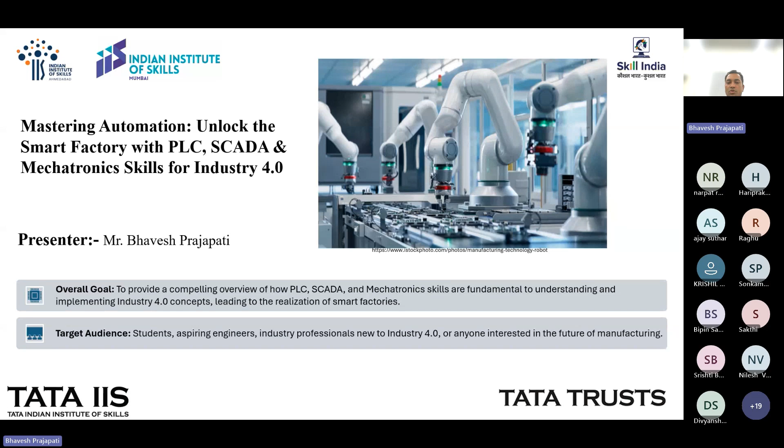This webinar must be interactive, not one-sided. However, your mic is not enabled yet, so I will request you to type your answer in the chat box.

So the first question is, what is mechatronics and what is automation? You can give the answer in the chat box. Meanwhile I can explain, but you can share your answer in the chat box so I can see.

Before Industry 4.0, this concept is very important to understand: automation. Everyone has this question, and many students and people are unable to answer what is automation. There is no fixed definition for automation, so anybody can define it in their own way.

So that is automation, this is one of the definitions. We cannot say this is the only definition for automation; anybody can define automation in their own language also.

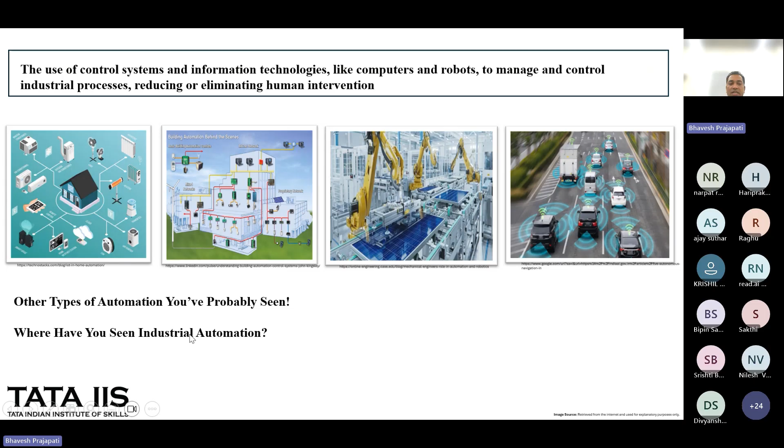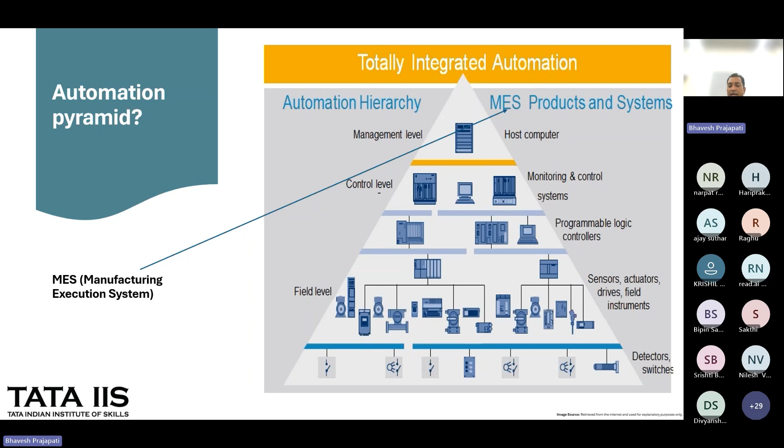In this slide you can see detectors, switches, and sensors are at the field level in the hierarchy. Another is programmable logic controllers — all controllers used in automation come in the level above the field level. Then control level: in control level we can put all monitoring devices like SCADA and HMIs, or any monitoring system. The last one is management level or supervisory level. All these systems are controlled by the supervisory or management level. This is the common scenario of a manufacturing execution system, MES, product and system. You can type your questions in the chat box if you have a question regarding that system.

So many people are typing questions in the chat box.

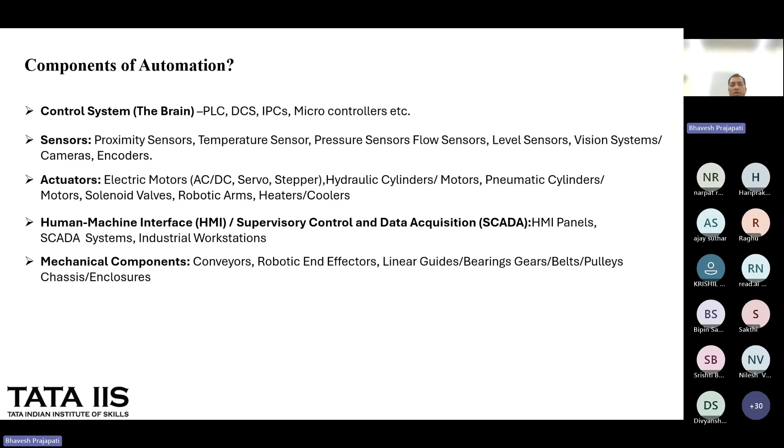Another is mechanical components like conveyors, end effectors, linear guides, pulleys - all these things you can consider as mechanical components. So these are the basic components of automation. If you want to design any kind of system, you have to study all these components first, then only you can design the system.

So these are the basics before going into Industry 4.0. It is very necessary for all students and beginners to first understand what Industry 3.0 is, because nowadays if you know all the revolutions, only then can you define Industry 4.0. But if you don't know what revolutions happened in the past, then Industry 4.0 becomes very new, confusing words for you.

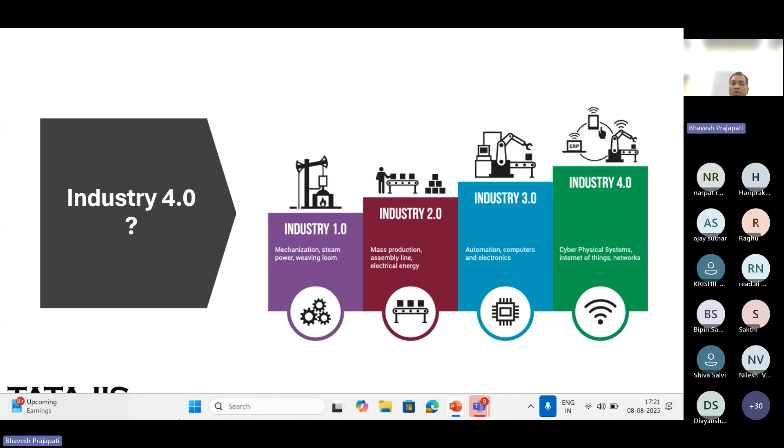If you have a related question, you can type it in the chat box. So another point is, why does Industry 4.0 matter?

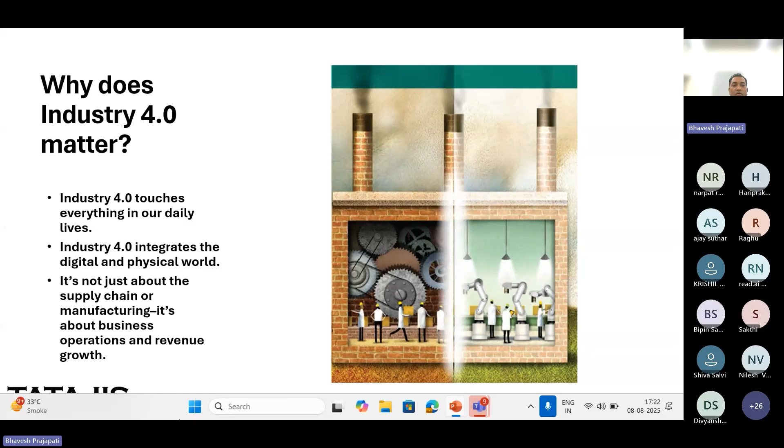This can happen only by using the Industry 4.0 concept, or you can say IoT. So, why does Industry 4.0 matter to students?

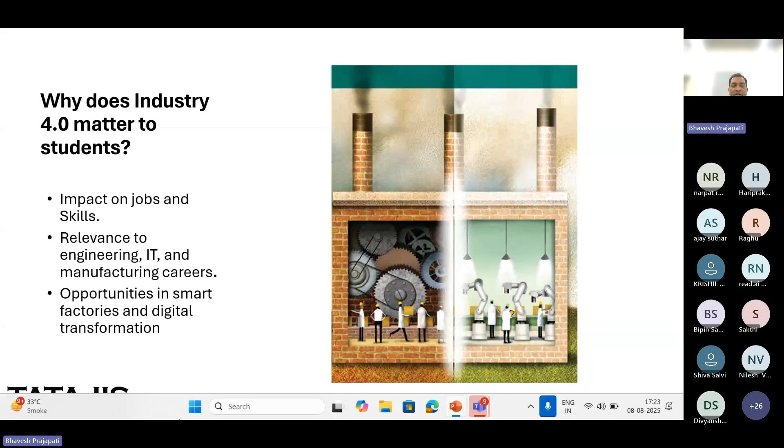Relevance to engineering, IT, and manufacturing careers, opportunities in smart factories and digital transformation. You have many opportunities in the upcoming future if the Industry 4.0 concept comes.

So here is just a short video. I cannot show all the videos, but you can see this one related to Industry 4.0: what is Industry 4.0 and what does it mean for you?

Technology is driving change across all areas of society. Not only do we increasingly use it and even rely on it in our personal lives, we also find our workplaces digitally evolving, with more and more processes now being undertaken using technology.

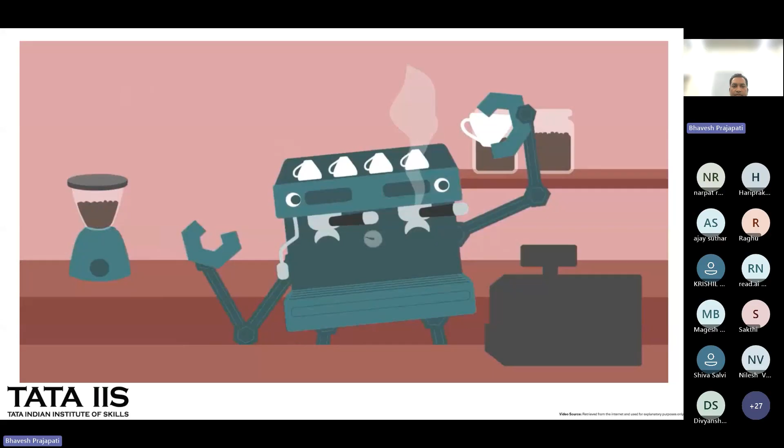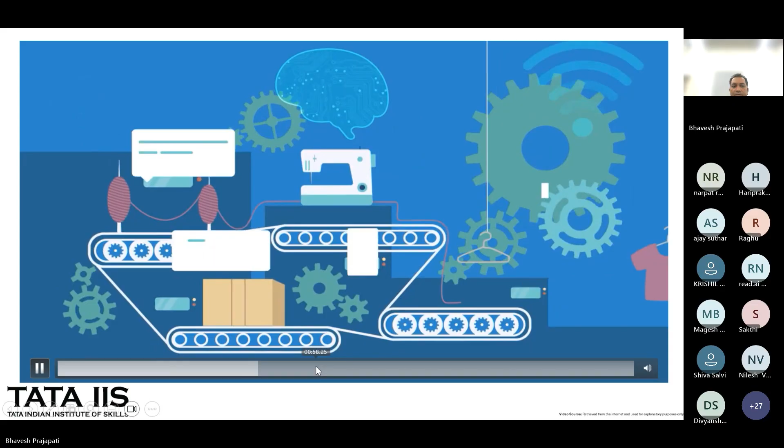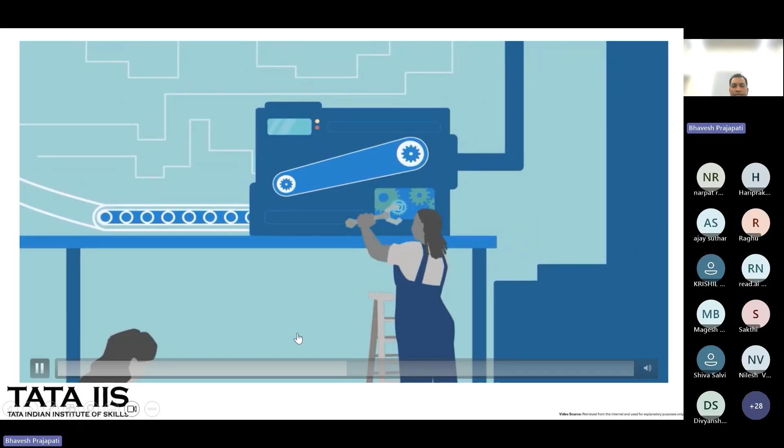This change is known as the Fourth Industrial Revolution, or Industry 4.0. Industry 4.0 will see many tasks that were once performed by us now done through the collection and analysis of real-time data, artificial intelligence, and the ability for all components of production to communicate with each other. Production can be really efficient and personalized according to customer needs. But what does this mean for us? With increased automation, our time will be freed for concentrating on more complex tasks. We will need a workforce capable of building and programming these technologies, but also making sure we are applying them to our lives in an ethical way.

There are core skills that we can offer that technology cannot replace. The human touch is going to be incredibly important, ensuring effective communication, problem solving, and supporting change management in this digital environment. There will also be a greater need for joint working across disciplines, creating new innovations. The future job market will be looking for graduates with an open mind to explore unknown future possibilities. We will all need to develop our skills in order to embrace and adapt to this ever-changing environment. What will you do to make sure you are ready?

You can type your answer in the chat box for this question, which is asked in the video, so you can understand better.

You can type your answer in the chat box.

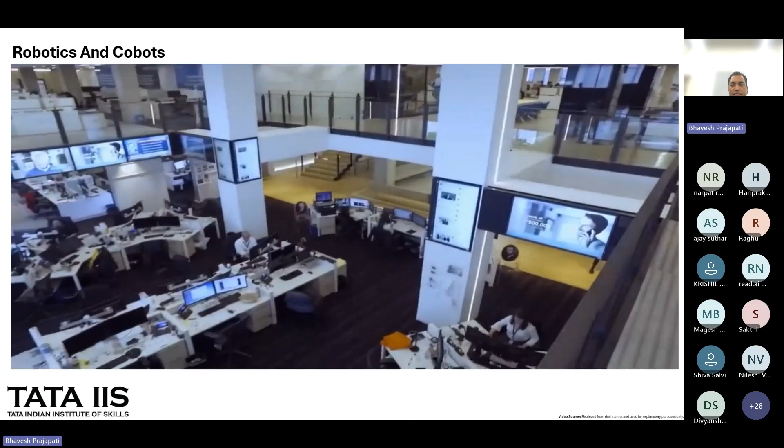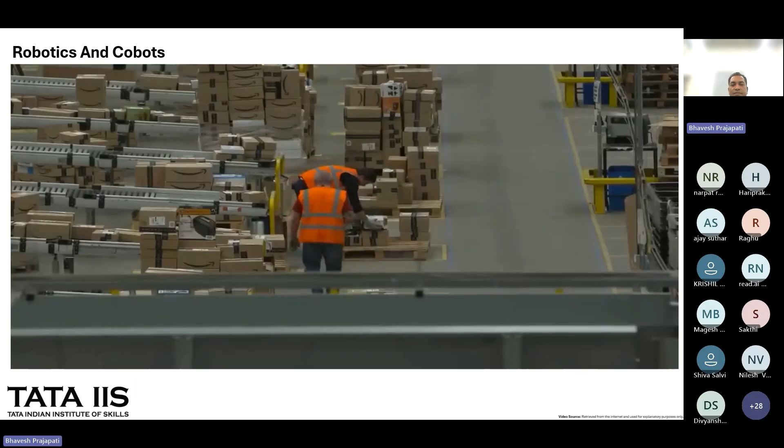Amazon is the world's biggest retailer, and its CEO, Jeff Bezos, is the world's richest man for one very good reason: his company is better than anyone else at giving people what they want quickly. Amazon acquired its undisputed status as the heavyweight champion of the retail universe thanks largely to its lightning-fast delivery times. The astonishing feat of ferrying hundreds of millions of items, from guitar strings to saucepans to car parts, directly to your door inside 24 hours is nothing short of a modern logistical miracle.

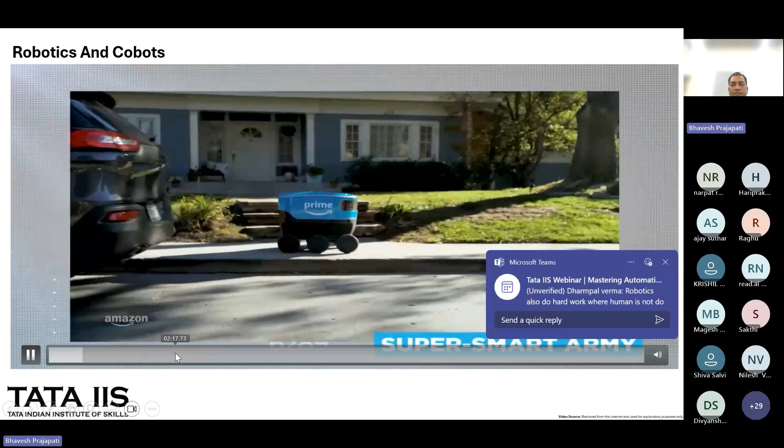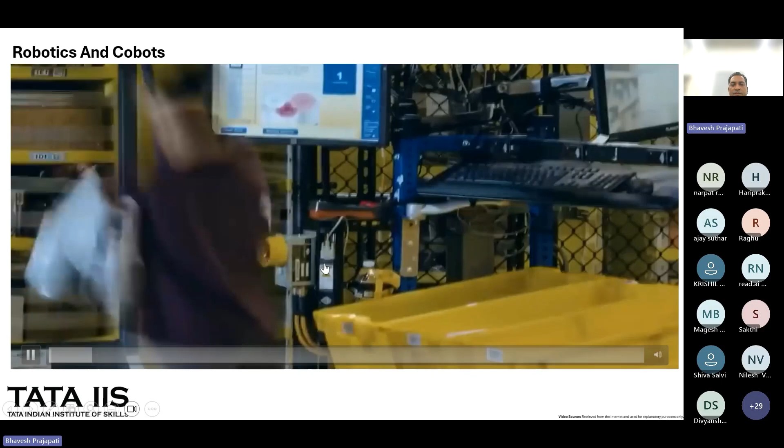So how does Amazon do it? A super smart army of slave robots, for one. Ingenious, if occasionally unscrupulous, management practices are part of the answer too. And the modern-day voodoo of deep learning AI, all of which are made flesh in the most advanced stockrooms the world has ever seen. So join us today as we button up our high-vis jacket and journey inside Amazon's smart warehouses.

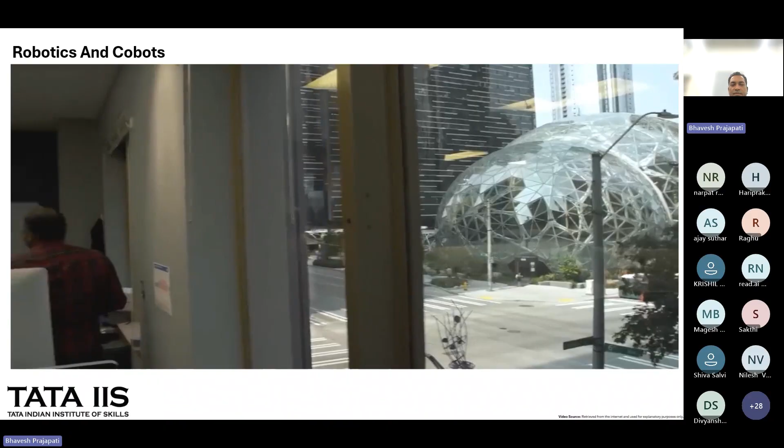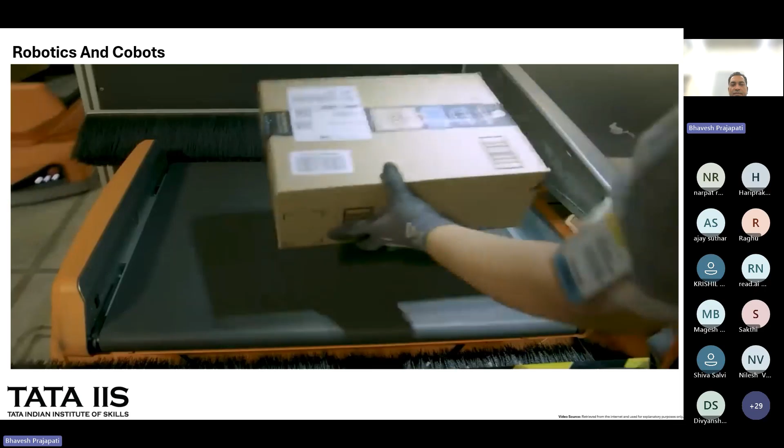In the year to September 2020, with the global economy in the teeth of coronavirus and the bleakest employment outlook in history, Amazon reported global revenues of little under $350 billion. That's roughly double what it earned in 2017, by the way. Only 3 short years.

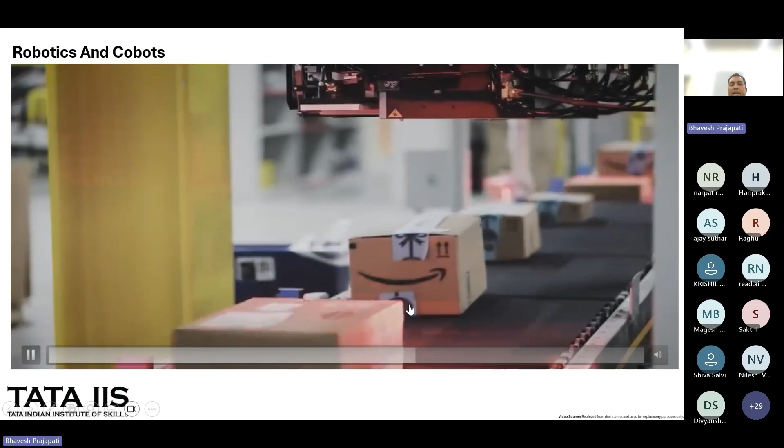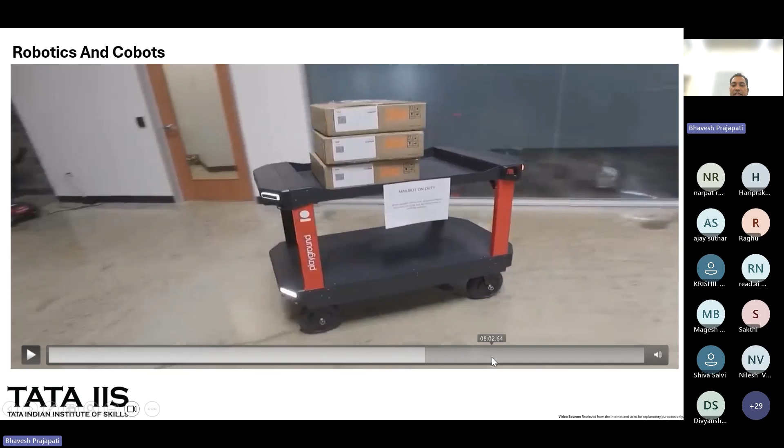Human pickers work alongside machines, co-workers in the warehouse, with a relentlessly percussive racket behind them. This video will show you the reason every package is labeled up to a second, and give a hint of what will happen in the coming years with robots. Amazon recently purchased Canvas Technologies, a firm specializing in autonomous robotic carts, so Amazon can deliver all items to the customer in a fast way. That's the reason behind this. All this works due to cobots and robots, and AMR, autonomous mobile robots, which they are also using. So everything in the warehouse is happening via robots, which is why they deliver fast to the customer. They are using complete automation, complete robotic automation.

Another technology pillar of Industry 4.0 is augmented reality. If you've heard about this before, you can type in the chat box, or if you know something about this, you can also type in the chat box. So what is augmented reality?

Nowadays, in many industries, people are using this technology for assembly and disassembly of things, so there's no need to use any manual or instruction manual - it's available directly. Let me show you a video, and then I'll ask you a question about how this is happening - that would be better. So let's see the video.

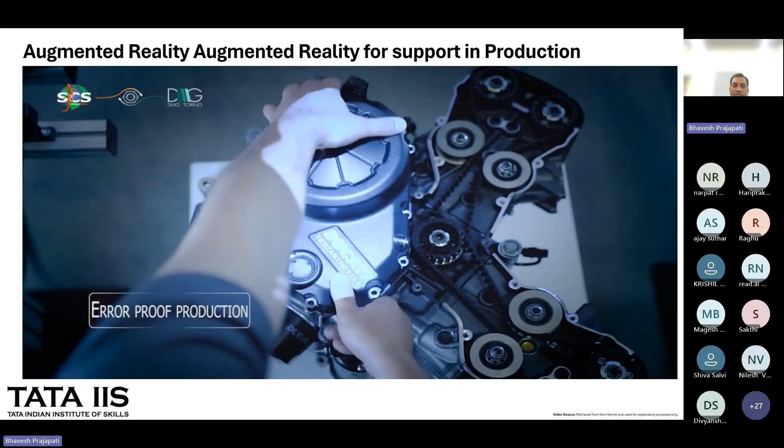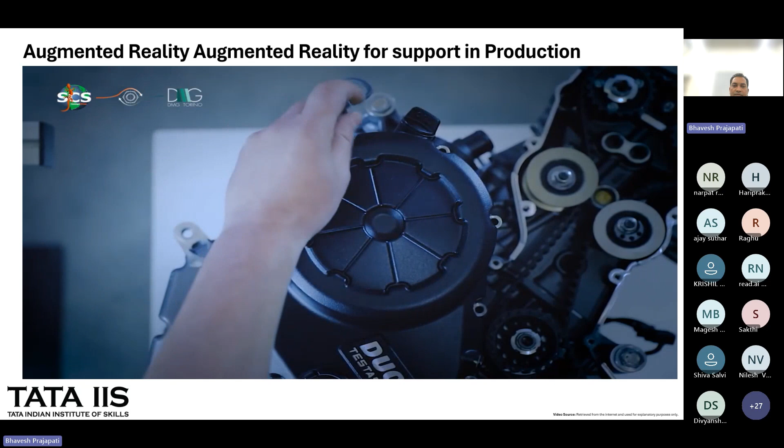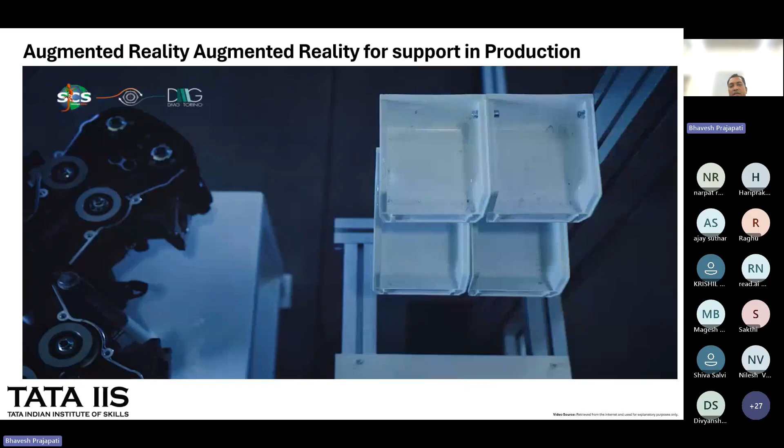Meanwhile, you can type your answer in the chat box about how it is happening, if you know about this technology - because somebody is doing the assembly and from somewhere the instructions are also coming automatically.

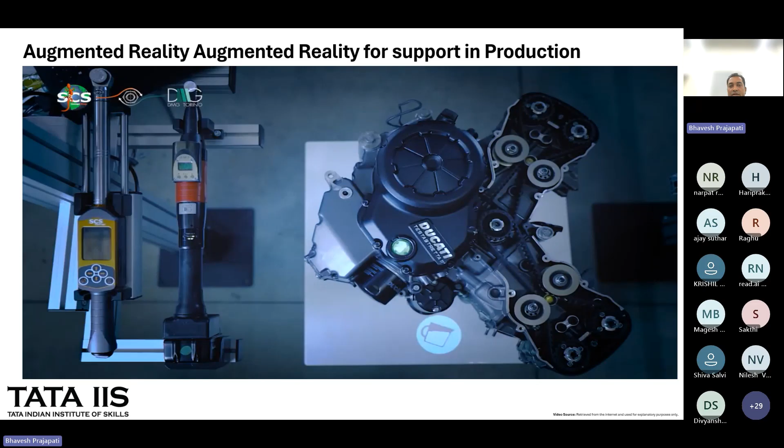That is called augmented reality. So by using this technology, assembly and de-assembly is very easy for new people who recently joined the company, or for assembly work in general.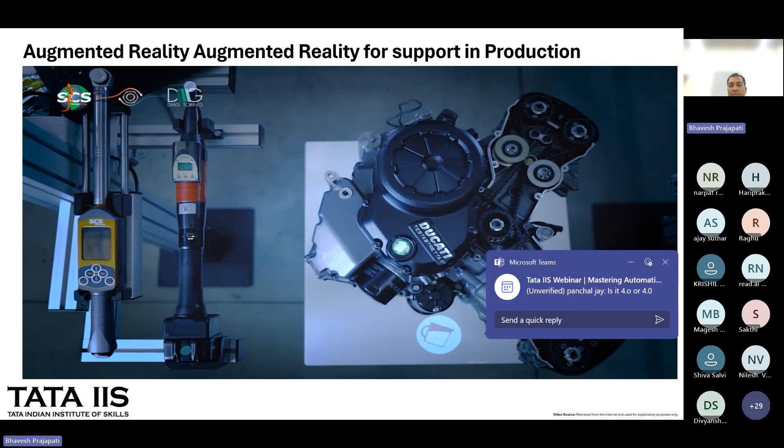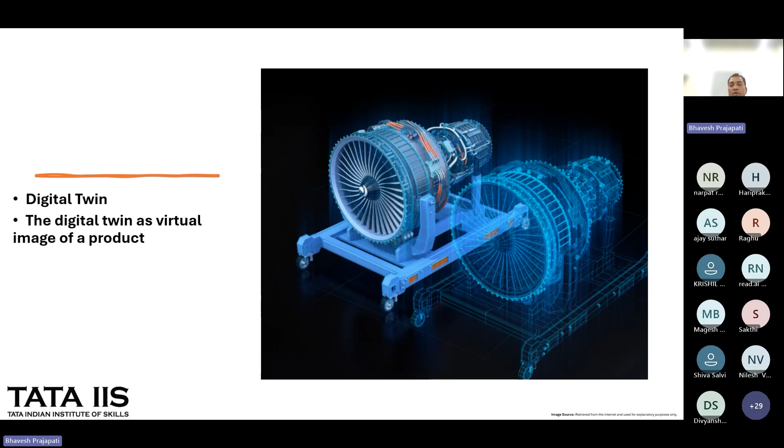Then another pillar is digital twins. It's not completely used by all industries yet, but slowly many industries have already started to use digital twins. You can prepare a complete copy, or a twin, from your original part. If you have some dedicated part, you can generate a digital twin completely, then use it for other work, or do some R&D work, or redesign work on that. This is also a pillar of Industry 4.0.

Another pillar is RFID - you all know the full form, radio frequency identification - used to identify parts and details. In most industries, if parts are moving, or boxes are being packaged, or some production is happening, or a variety of production is happening, this technology is used.

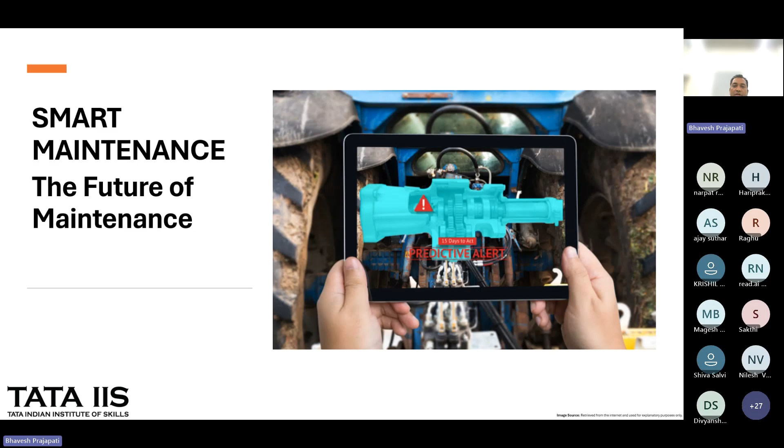Another is smart maintenance, the future of maintenance. Similar to augmented reality, you can use smart maintenance to see all the instructions and defects available in the machine remotely. No need to go physically to the site or remote location. By using your smart tablet or smart devices, you can identify problems and rectify them by giving remote support or support on call. This is a very good technology which industries are moving into.

Another is condition monitoring. Let me give you one example.

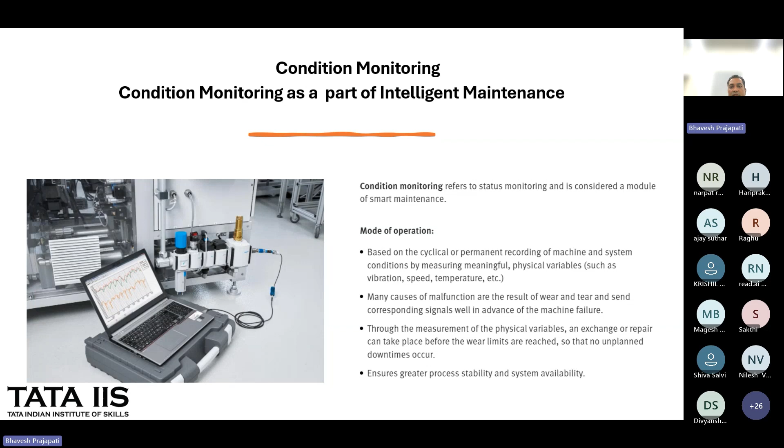M2M communication is another technology nowadays, where machine is communicating with machine. In industry, there are many devices which can be connected machine to machine, and they are using this technology to transfer data from one device to another device.

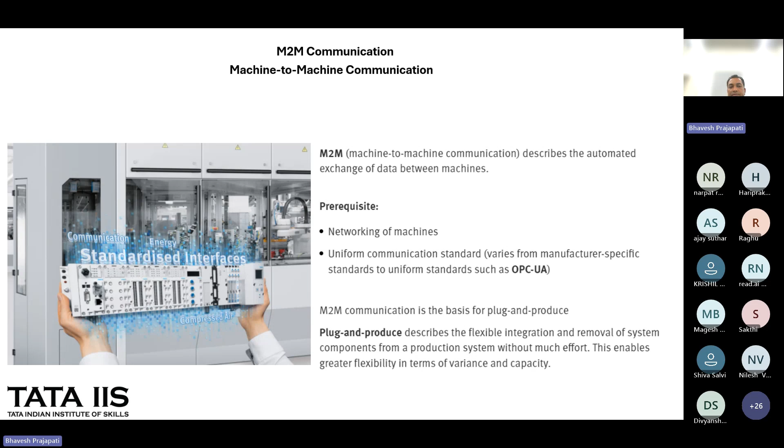Cyber security is also another type and element of core technology 4.0. Nowadays, everything is happening via internet and clouds, your data is stored on the clouds, so cyber security is also very important to protect the data.

Here I will show you an example of machine to machine communication, how the machine and product decide what process should happen on it. This is the best example of how the product defines its own process, what process should happen on it.

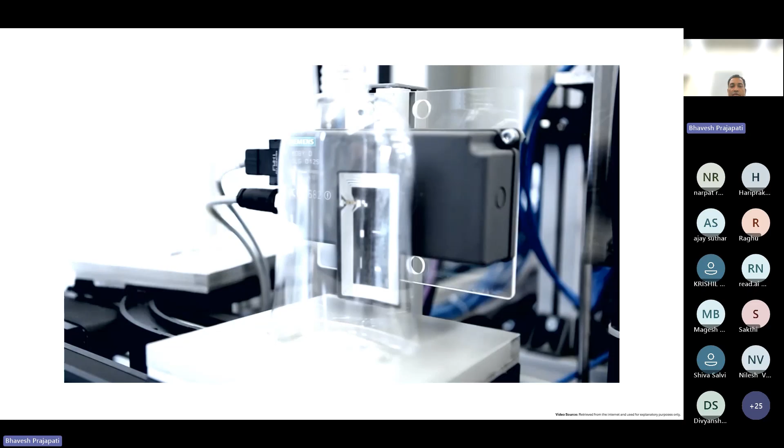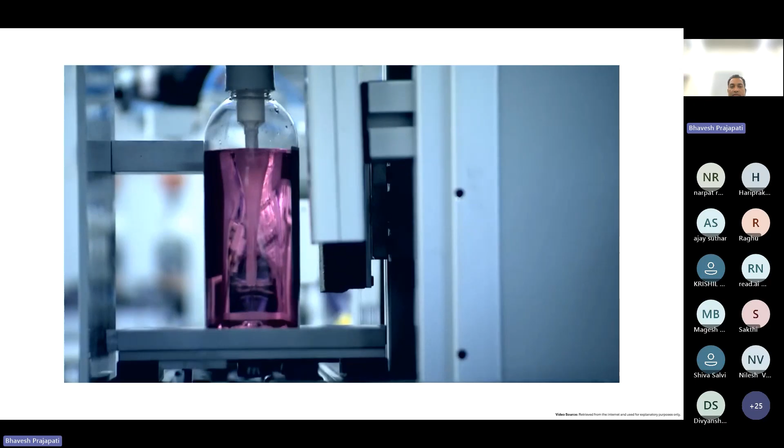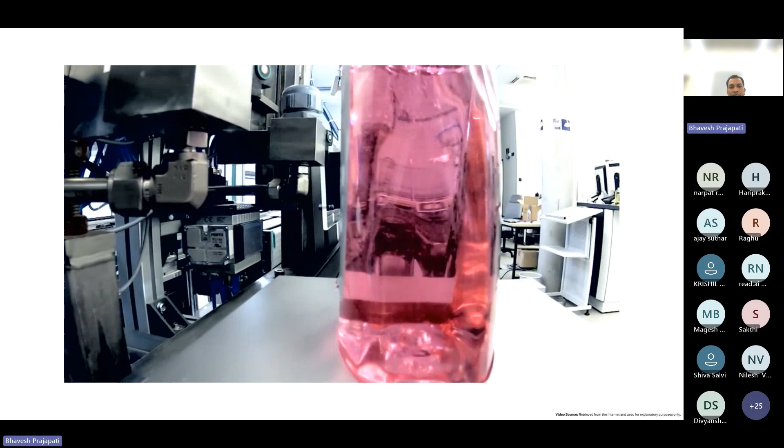We can see here a vision of tomorrow's manufacturing. Products finding their way independently through the production process. In intelligent factories, machines and products communicate with each other, cooperatively driving production. Raw materials and machines are interconnected within an Internet of Things. The objective: highly flexible, individualized and resource-friendly mass production. That is the vision for the fourth industrial revolution.

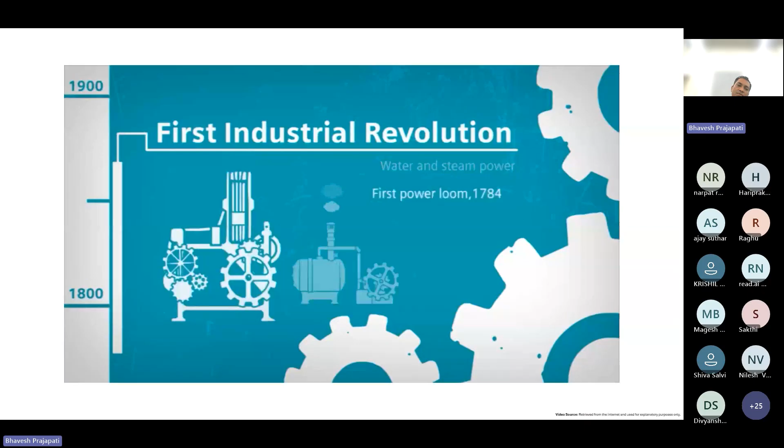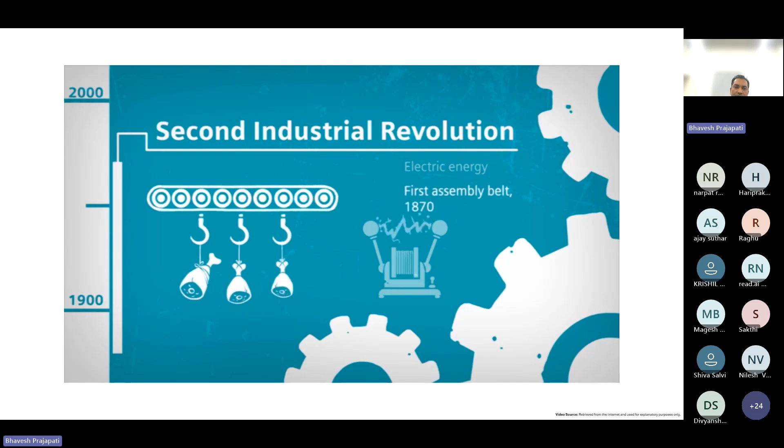A look back at history. At the end of the 18th century, the first steam engines and the intelligent use of hydropower revolutionized production. The late 19th century saw the rise of electrical engineering and mass production. The first moving belt conveyor was used as long ago as 1870 in the slaughterhouses of Cincinnati, Ohio. In the mid-1970s, electronics and IT began to expand rapidly into industry. Siemens developed the first Simatic, and production became increasingly based on computer-assisted controls.

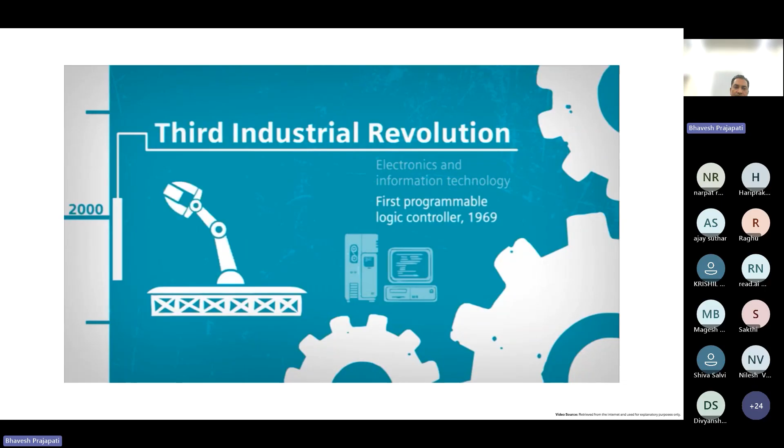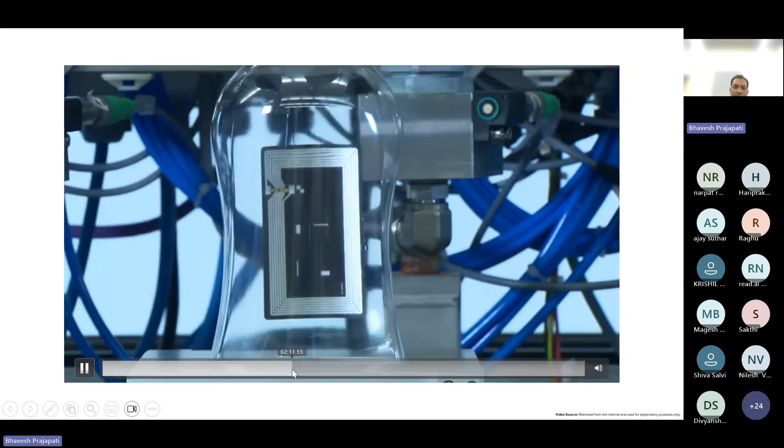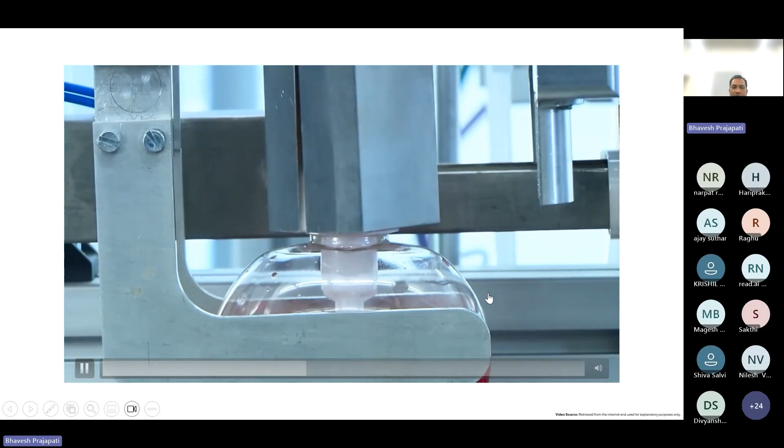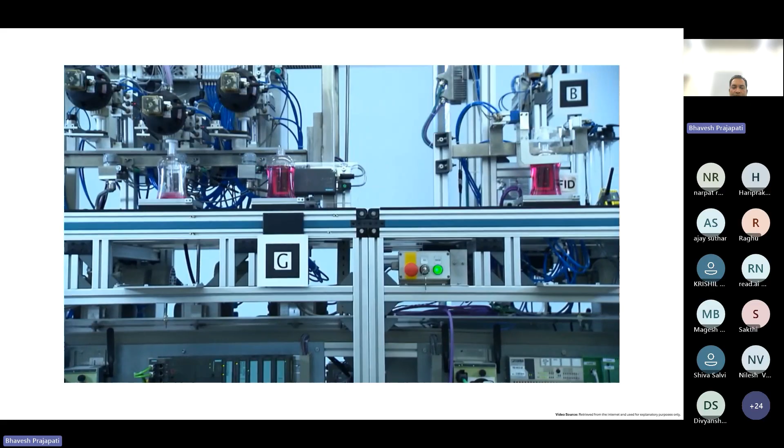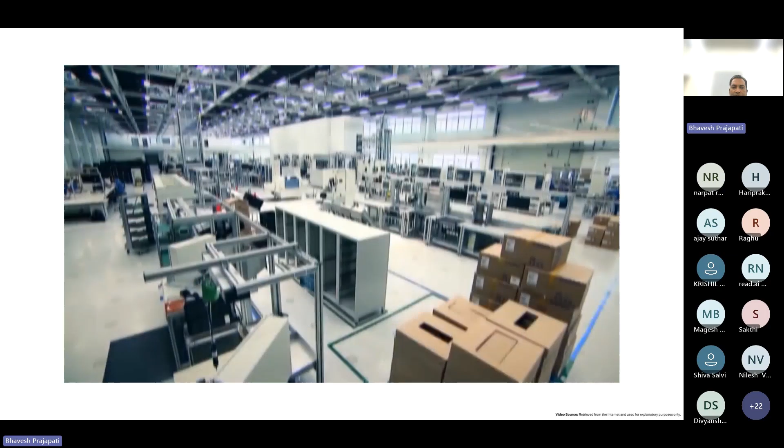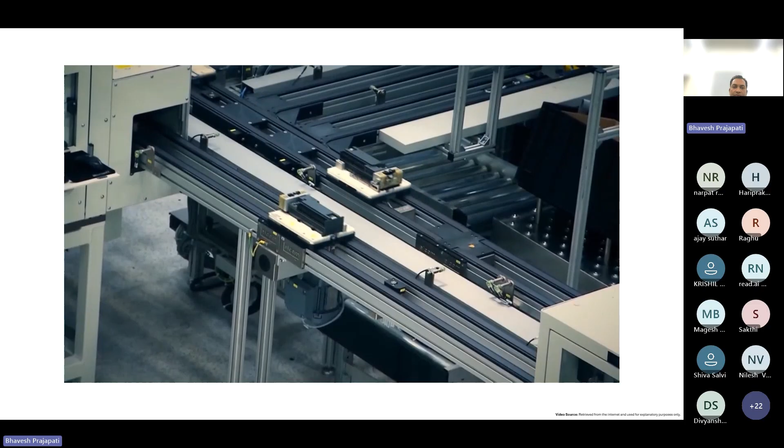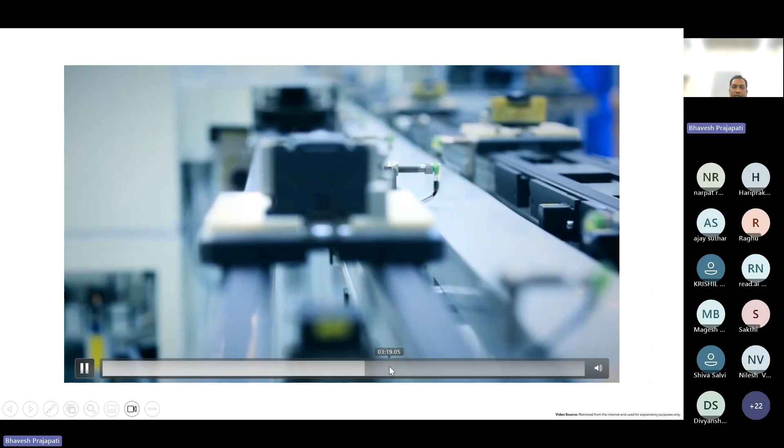Factories with networked machines and products are already in existence today. In the future, however, these hitherto self-contained systems will be connected together in a comprehensive network. All devices, machines, and materials will be duly equipped with sensors and communications technology and connected to each other. These systems are known as cyber-physical systems. The highlight is that they communicate with each other and also control each other cooperatively.

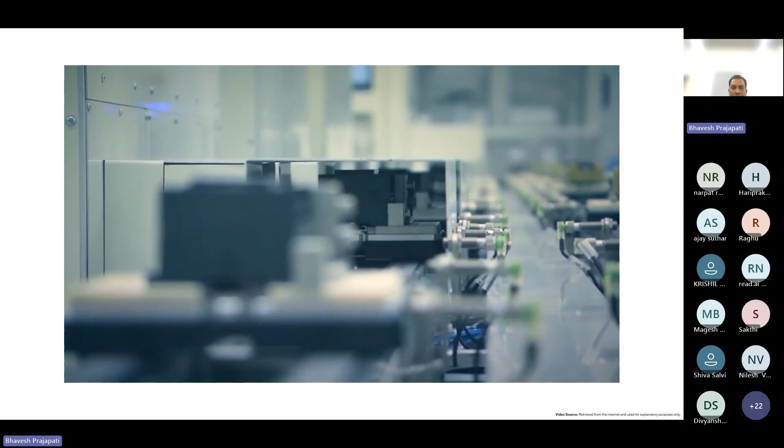Production that can be rapidly adapted to market changes, because in the future, product life cycles will be even shorter. Another reason why it's increasingly important to depict engineering across the entire life cycle. Maintenance, for instance, is planned in from the very start.

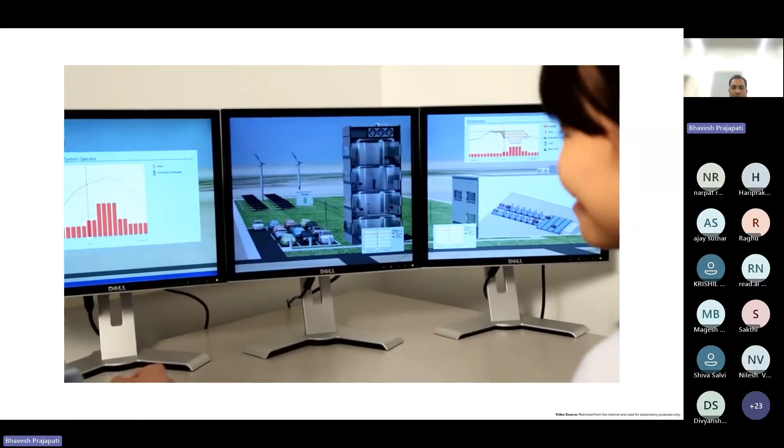One potential scenario is enabling the PLC to react to utility pricing information in building automation. We can enhance PLCs to use simulation to calculate.

So here we have seen, as we saw, the product itself communicates with the machine about what process should happen with it. Due to RFID tags, since an RFID tag is available on the product, it communicates every detail available in the tag. The machine will scan it and decide what process should happen on that product. This is machine-to-machine communication.

Now another topic is big data, which is also a core element of Industry 4.0. We can say data is gold now, because there is so much data on the cloud, and most things are stored on the cloud.

Data we can consider as gold in the future, so cloud is also important. There are many types of clouds available to store data - infrastructure as a service, platform as a service, or software as a service. You can choose any cloud to store your data, because nowadays all devices of the industries are connected to the cloud via internet.